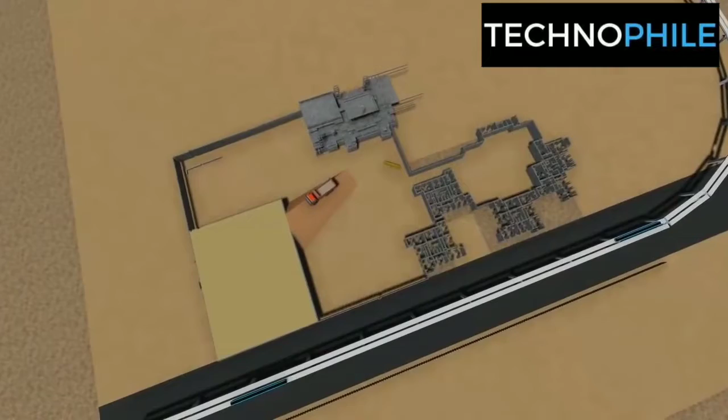The area of clubhouse is 75,000 square feet. Obviously India's largest, out of which first phase of 50,000 square feet construction is undertaken by ITD Cementation. The clubhouse consists of 4 basement slabs including raft, 1 ground slab and 3 superstructure slabs.

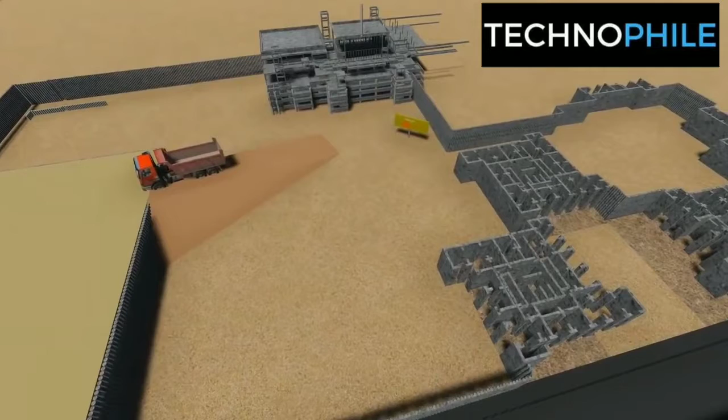The method of construction of the clubhouse is top-down for basement, first time of its nature in Asia, and conventional for superstructure. Following sequence is planned.

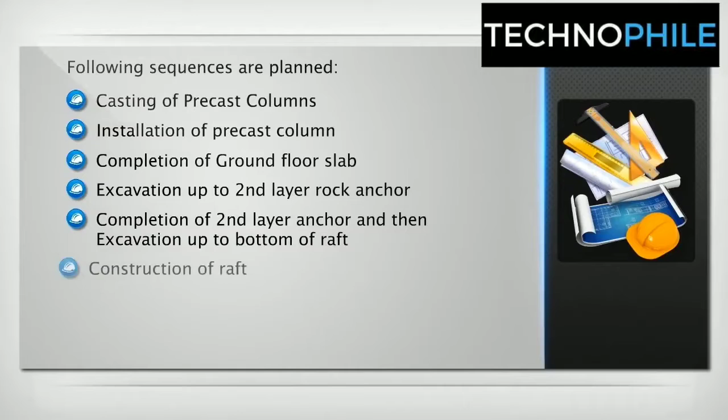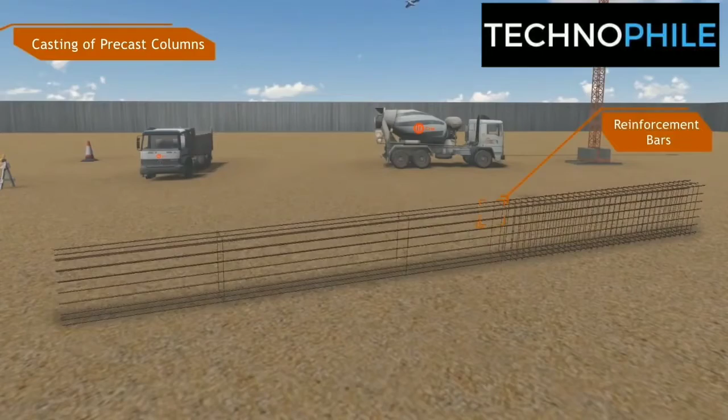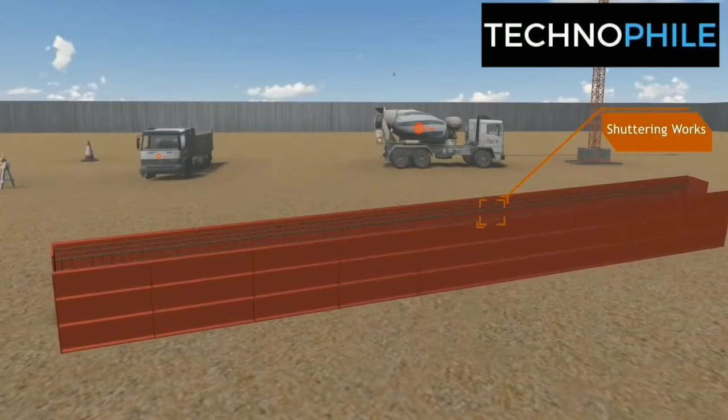Casting of precast columns. Reinforcement work shall be fabricated as per approved drawing and bar bending schedule with proper cover block and fixing of coupler at required level. After completion of reinforcement work, side shuttering works shall be carried out with proper dimension and levels with proper support.

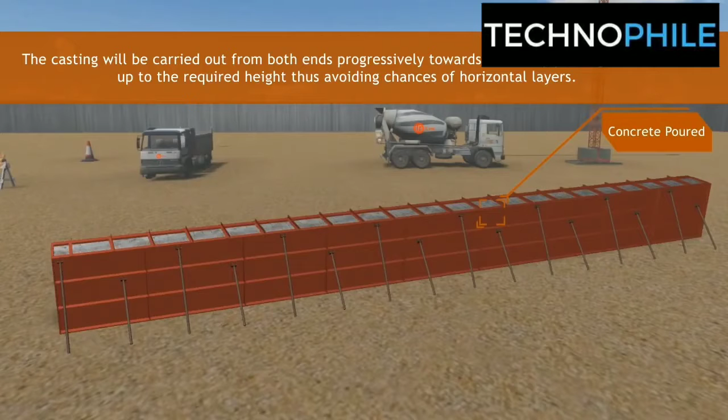After completion of shuttering, concrete of required grade shall be poured with chute arrangement or hopper arrangement with crane. The casting will be carried out from both ends progressively towards center by pouring concrete up to the required height, thus avoiding chances of horizontal layers.

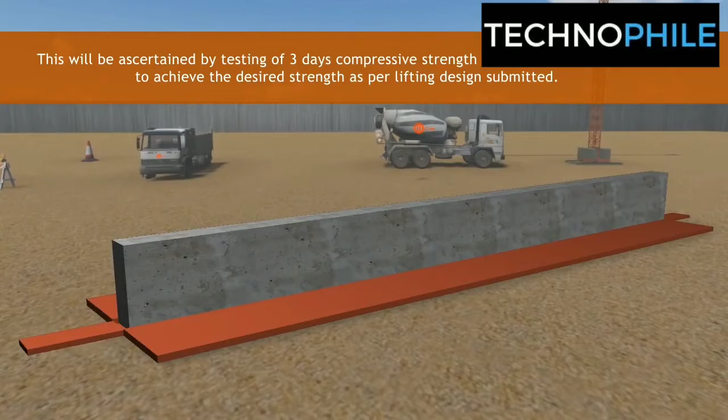Side shutter shall be removed after 24 hours, while bottom shutter shall be kept 3 days after casting. This will be ascertained by testing of 3 days compressive strength, that is 40% of the FCK of cubes, to achieve the desired strength as per lifting design submitted.

Our design for lifting for placing at stacking yard is considered 3 days and for installation of column is considered for 7 days.

Installation of precast columns. On initial completion of approximate 5 to 6 meters pre-boring, permanent liner of 8 millimeters thick of internal diameter 1300 or 1000 millimeters shall be inserted into the bored or drilled hole with necessary verticality up to weathered rock. The center of MS permanent liner shall be checked prior to commencement of further boring with respect to reference points.

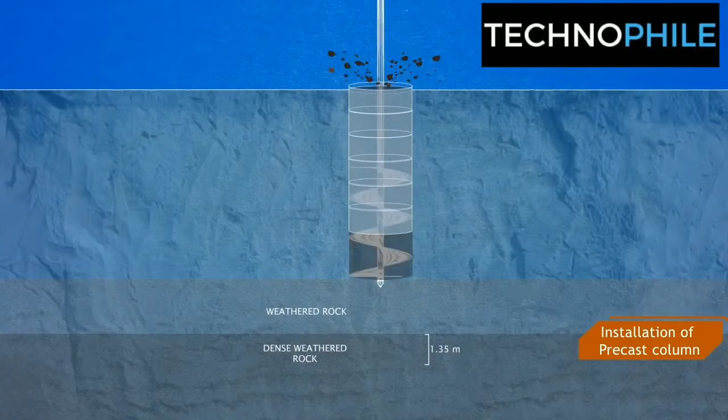The verticality of pile bore will be checked with regular interval during casing insertion up to rock with reference point as well as bubble fitted with HR 180. Once the permanent liner is centered, further boring or drilling shall be carried out with auger and soil bucket till it reaches the final depth as per design and drawing.

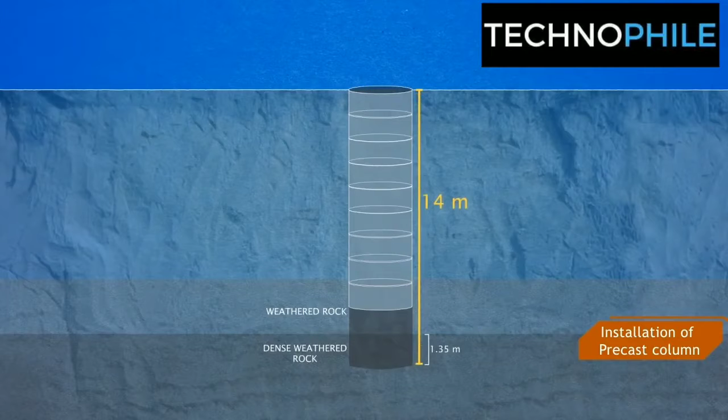The precast column length will be bottom of raft plus 1 meter and pile termination will be 1.35 meters below hard rock encounter. Once pile is terminated, precast column member will be lowered into the pile with the help of crane of capacity 75 metric tons, with ISMB 300 at center of precast with 12 mm plate welded at both ends as shown in GFC drawing.

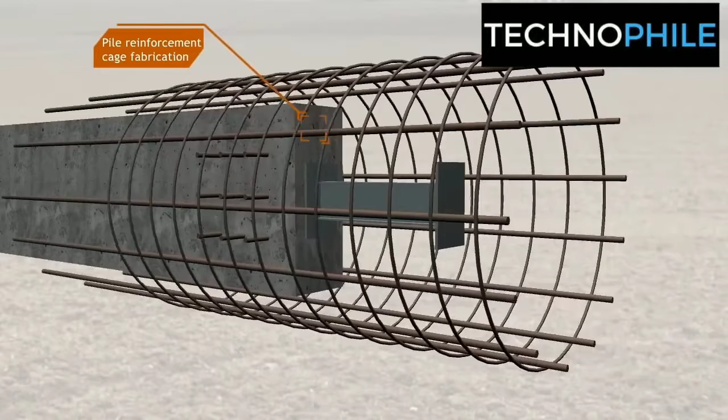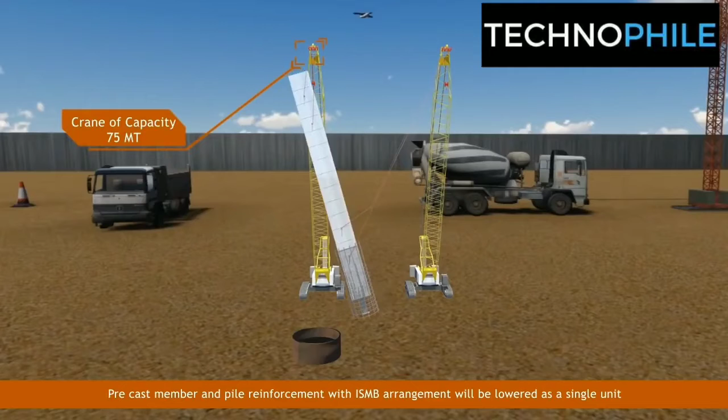The length of ISMB and pile reinforcement cage will be finalized after bore hole termination depending upon site situation. Prior to lowering of precast member, it will be wrapped with plastic sheet to have a separation between column and lean concrete which will be poured later. The precast member and pile reinforcement with ISMB arrangement will be lowered as a single unit.

During lowering of column, to maintain proper verticality and position of precast member, additional precautionary action of ISMC 150 will be provided at the column corner.

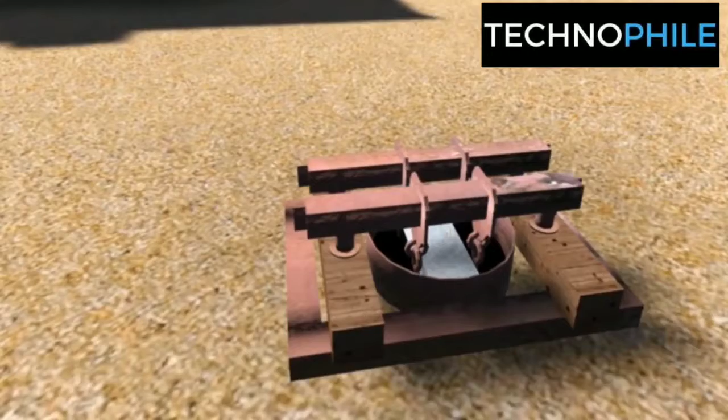Concreting of M40 will be poured up to a specified height of column from bottom to have a proper fixity at bottom. The concrete will be poured up to the pile column plus additional overflow level shown in the drawing. The level of the concrete will be ascertained by lowering cup fitted with reinforcement steel.

After reaching of concrete overflow level, balance annular space above the concreted portion shall later be filled with lean concrete of approximate grade M10, 3 hours after pouring of structural pile concrete in between MS liner. The concept of permanent liner with M10 grade concrete filled in annular space over pile is intended to address the slenderness problem of the column during excavation.

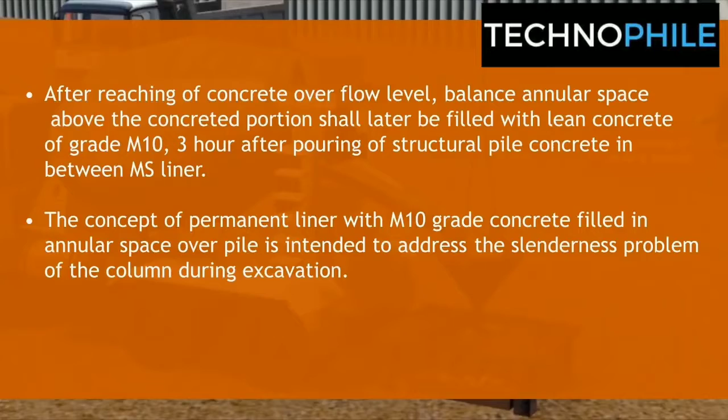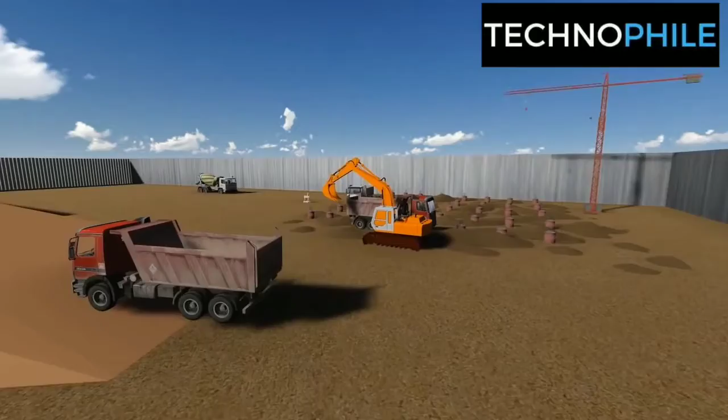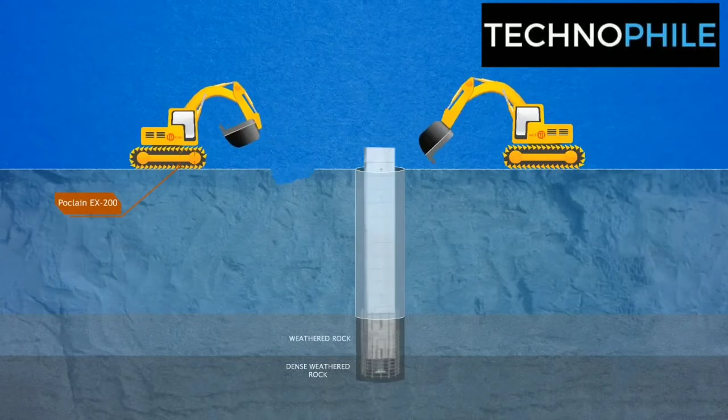Completion of ground floor slab. After installation of column, activity for ground floor slab will be started. For ground floor slab, excavation will be carried out up to the level of plus 0.4. After that, the area will be levelled for working platform for receiving rubble soling.

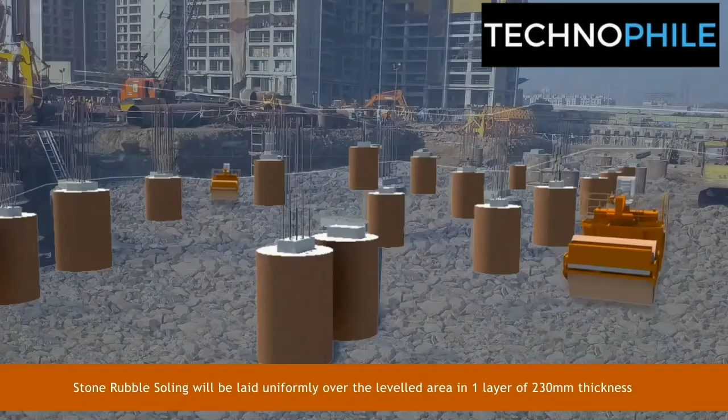Rubble soling. Stone rubble soling will be laid uniformly over the levelled area in one layer of 230 mm thickness. Staging and bottom shuttering. Staging work will be started with cup lock arrangement.

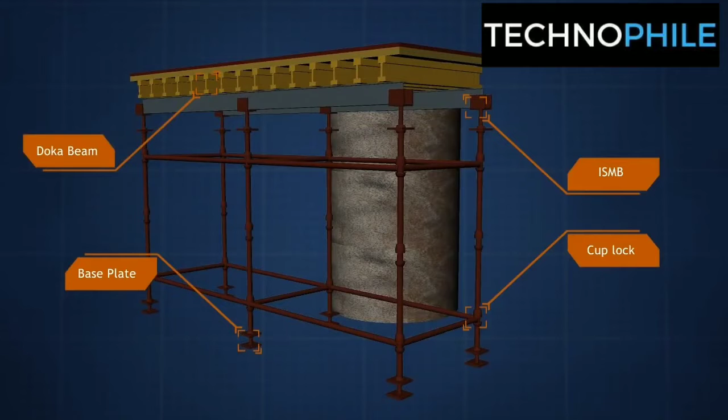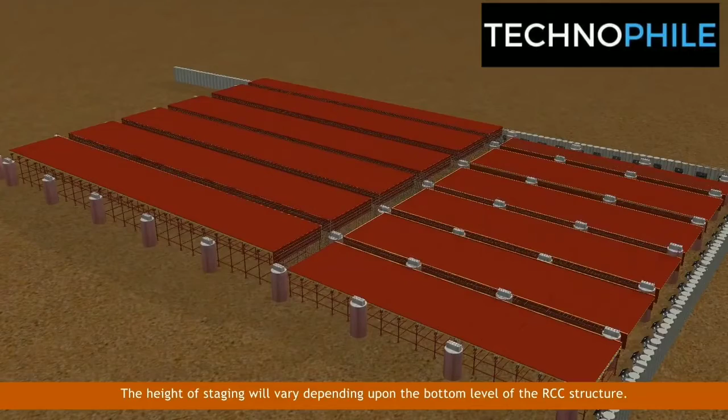The height of staging will vary depending upon the bottom level of the RCC structure. After placing of bottom shutter as per required level and position, rebar work for slab and beam will commence.

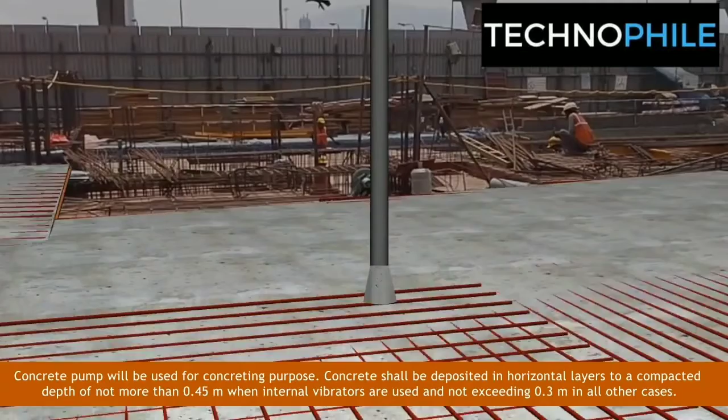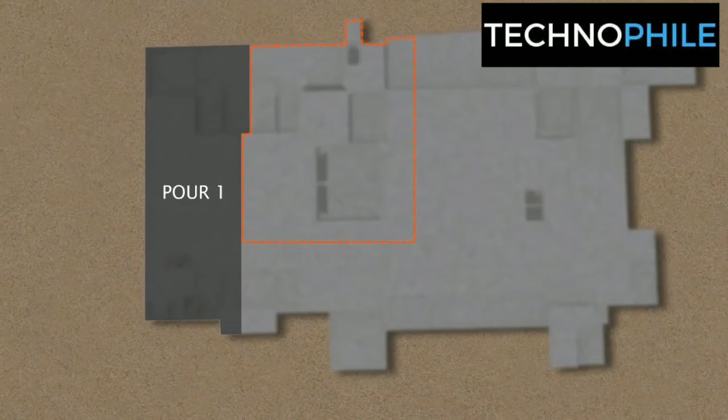Transportation and laying. Concrete pump will be used for concreting purpose. Concrete shall be deposited in horizontal layers to a compacted depth of not more than 0.45 meters when internal vibrators are used and not exceeding 0.3 meters in all other cases. Concrete shall not be dropped from a height more than 1 meter. In such cases, trunking or chutes shall be used and shall be kept closed and used in such a way so as to avoid segregation.

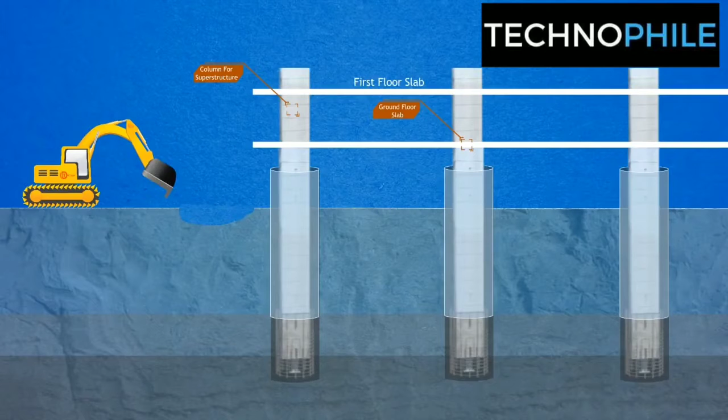Excavation work. From ground level to second layer anchor and then up to raft level. After completion of top slab, 14 days curing period shall be permitted before carrying out excavation below it. Prior to beginning of the excavation, strength criteria will be verified by checking compressive strength of cube, that is, 70% of the FCK should be achieved. After the curing period, excavation activity will be carried out with help of suitable mechanical excavator depending upon the available slab-to-slab clearance.

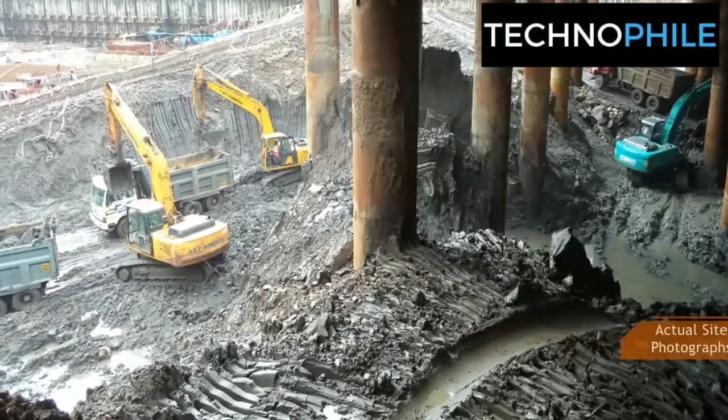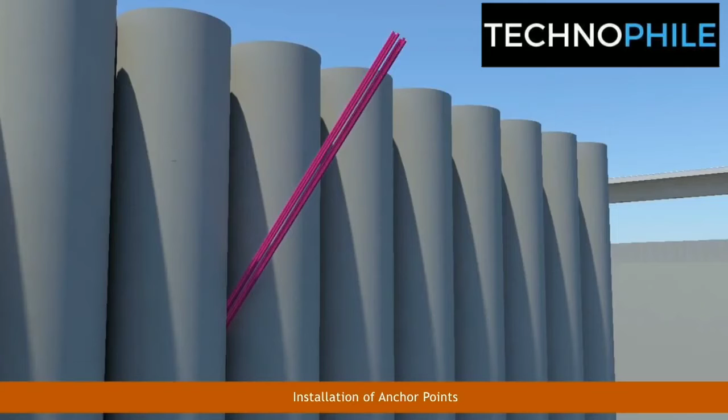Superstructure is simultaneously built while the process of excavation from ground level to second anchor point level is in progress. We have planned for excavation up to the second layer rock anchor level. The excavation for second layer anchor will be done up to the depth of 8.5 meters along the shore pile line of 25 meters width working area.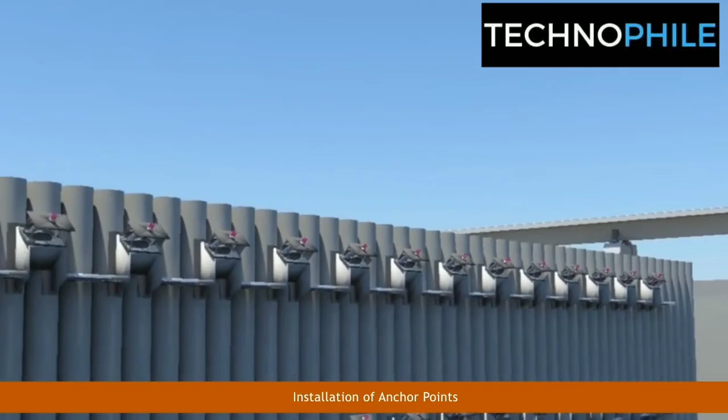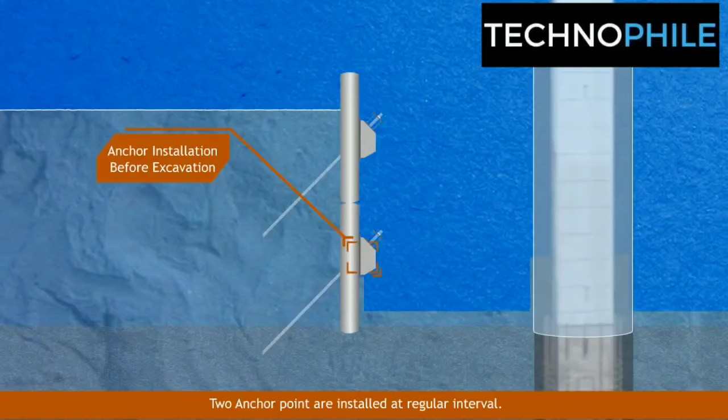Excavation work will be carried out in such a manner that the work commences from open side and proceeds towards the shoring pile side. The excavation will be carried out in slope such that proper ramp will be available at both open ends for disposal of excavated soil and machinery's movement.

Construction of B4 raft. After completion of excavation, PCC will be carried out for raft. After PCC, waterproofing will be carried out. Then, reinforcement will be placed as per VFC drawing and approved bar bending schedule. After proper side shutter as per drawing and dimension, concreting of raft will be carried out. Whole raft will be completed as per approved pour plan with proper sequence.

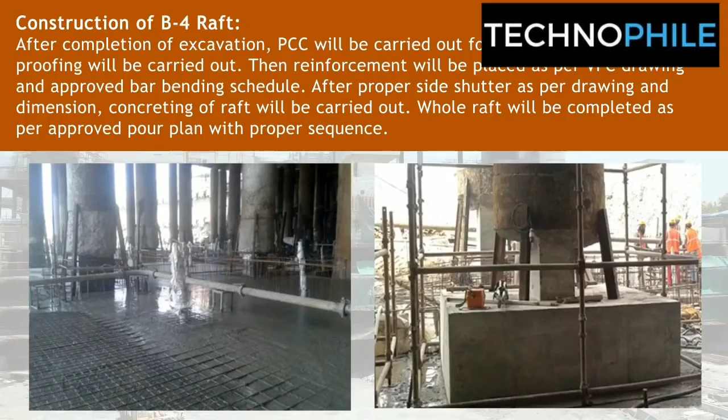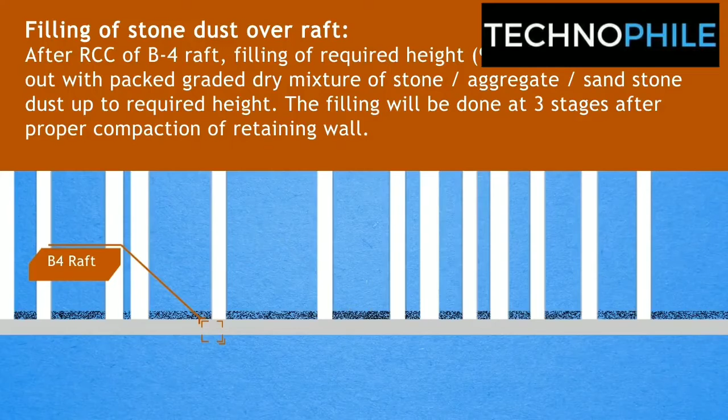Filling of stone dust over raft. After RCC of B4 raft, filling of required height, that is 950 mm, will be carried out with packed graded dry mixture of stone, aggregate, sandstone dust up to required height. The filling will be done at 3 stages after proper compaction of retaining wall. The spreading and leveling activity will be carried out with JCB and compaction will be carried out with the help of plate compactor.

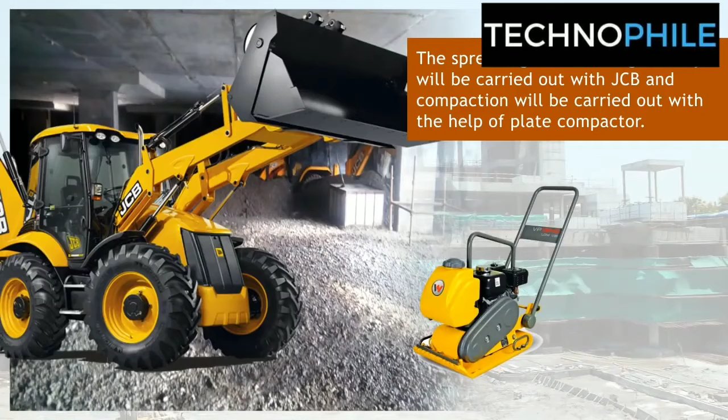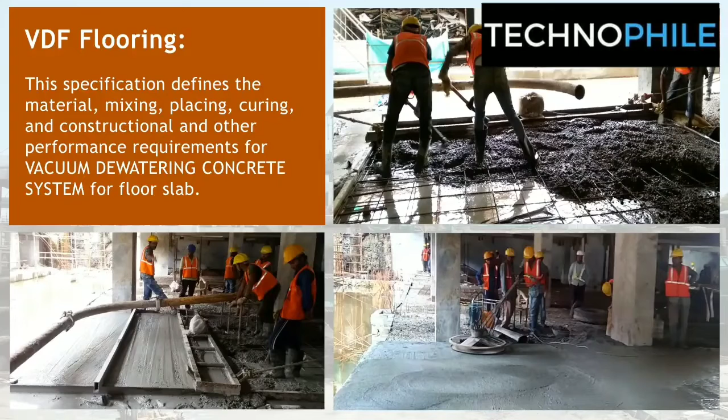VDF flooring. This specification defines the material, mixing, placing, curing and constructional and other performance requirements for vacuum dewatering concrete system for floor slab. Construction of retaining wall along Eastern Freeway. The eastern roadside retaining wall along shoring piles will be executed with bottom upwards method from B4 raft level to ground floor slab.

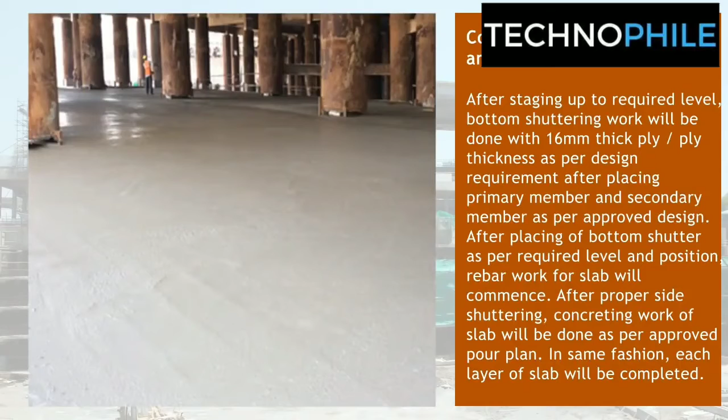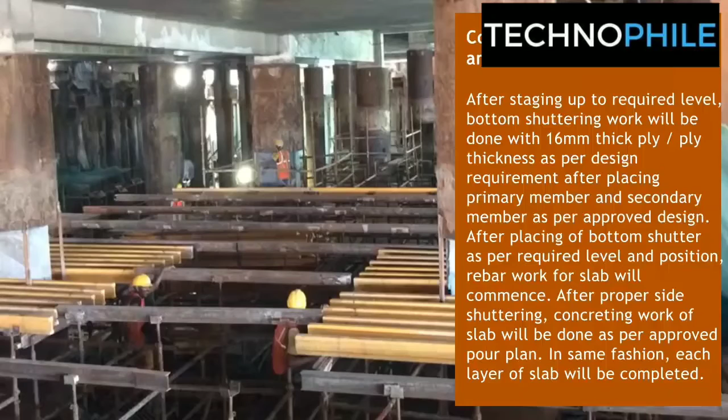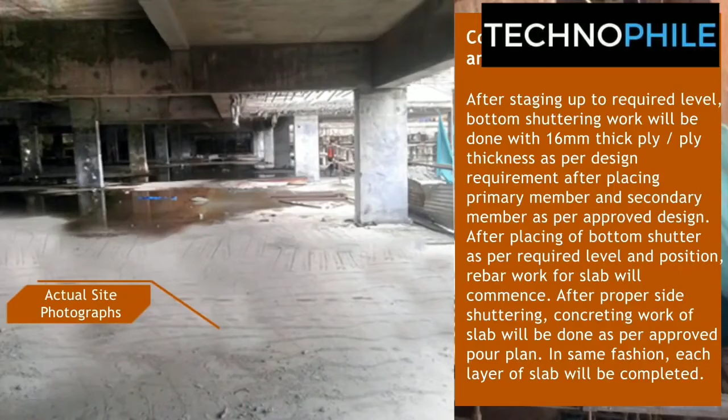Construction of B2, B3 and B1 slab. Staging and bottom shuttering. After concreting of the bottom raft, staging work will be started with cup lock arrangement. After staging up to the required level, bottom shuttering work will be done with 16 mm thick ply as per design requirement after placing primary member and secondary member as per approved design. After placing of bottom shutter as per required level and position, rebar work for slab will commence. After proper side shuttering, concreting work of slab will be done as per approved pour plan. In the same fashion, each layer of slab will be completed.

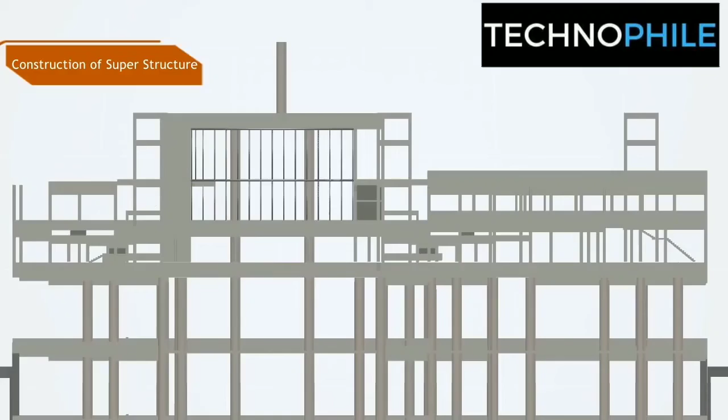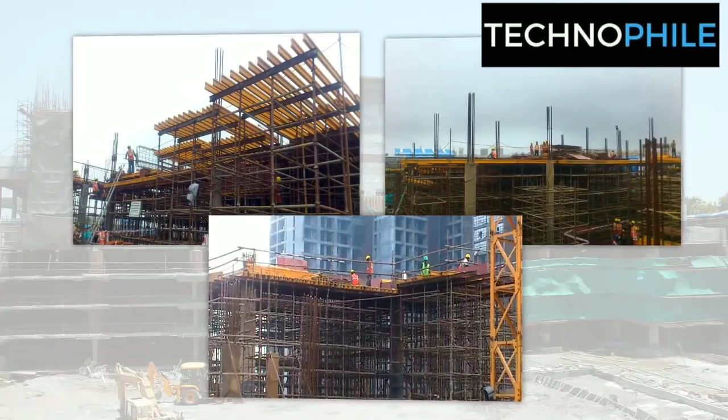Construction of superstructure. Superstructure is constructed simultaneously while other activity is being carried out in substructure. The major advantage of this top-down scheme is simultaneous construction of substructure and superstructure, which will help in getting more time and accuracy in finishing of superstructure. First floor, second floor and atrium floor is being constructed with approved staging and supporting scheme. The staging with cup lock arrangement is being erected as per approved design and bottom shuttering is placed as per level.

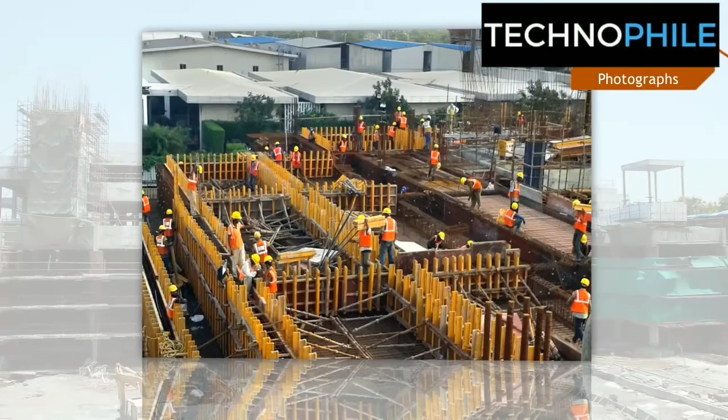After placing of reinforcement as per approved BBS, side shuttering work will start as per approved support scheme and concreting will be carried out. The major challenge in superstructure is extensive use of hanging shutter, depth of beam up to 2500 mm and top level variation between beam and slab. Also in superstructure, we have executed miscellaneous structures like pardi wall, drop pardi, staircase, lintel beam, wind scoop, etc.

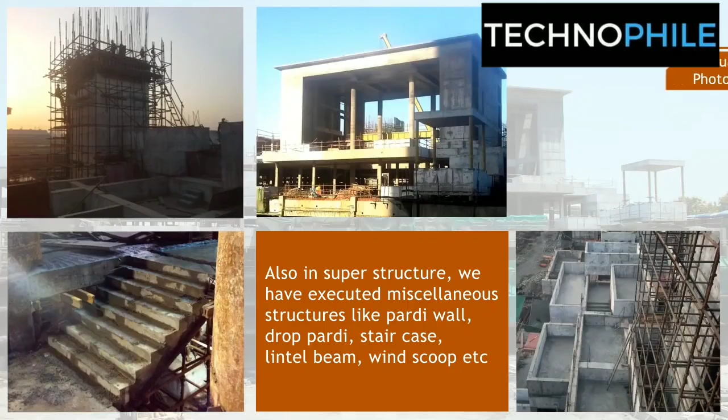With this innovative method of construction of clubhouse, at every step of construction, lots of technical as well as constructability challenges are being faced up to completion of work. ITD Cementation overcame these hurdles with proper understanding of the job, planning and coordination between team members, dedicated and target-oriented teamwork, out-of-the-box and innovative thinking, never say die attitude, etc. This project will set a major milestone for our company and will open the door for more opportunities for construction of various projects all over India through this scheme.